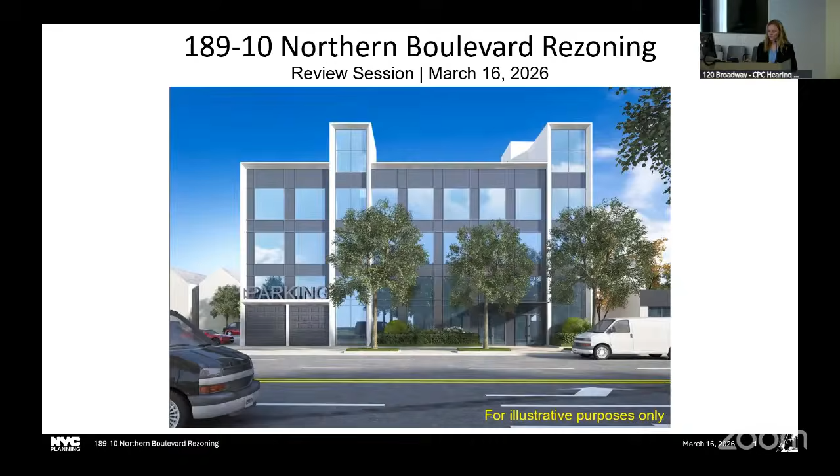Good afternoon, Commissioners. This is a private rezoning application for 189-10 Northern Boulevard. This application was filed by Prince Street 606 LLC, and it is located in Auburndale, Community District 11. It proposes a zoning map amendment to rezone from R3X and R3-2 districts to an R3-2 district with a C2-4 commercial overlay. This action will facilitate the development of a new 3-story commercial and community facility building with a total floor area of just under 15,000 square feet. It will also address split lot conditions on lots 11, 12, 22, and 27, and make as-of-right the existing legally conforming commercial uses along Northern Boulevard.

On May 10th in 2023, the CPC approved a similar application by the applicant for a zoning map amendment to change the project area to an R3-2 district with a C2-3 commercial overlay. The applicant later withdrew the application in July of that same year before the City Council vote due to a lack of political support. The applicant has reported to us that prior to starting this application, they spoke to the council member and the community board, and they expressed support.

On November 4th, 2025, voters approved New York Question 3, a ballot measure to revise the New York City Charter by adding Section 197E, the Expedited Land Use Review Procedure, or ELURP. This charter revision facilitates an expedited process for certain land use applications, including low-density rezonings like this one. Under this expedited review procedure, this project would undergo 90 days of public review instead of the typical 7-month timeline undertaken through the standard process. This enables a project like this to accelerate the timeline from proposal to approval.

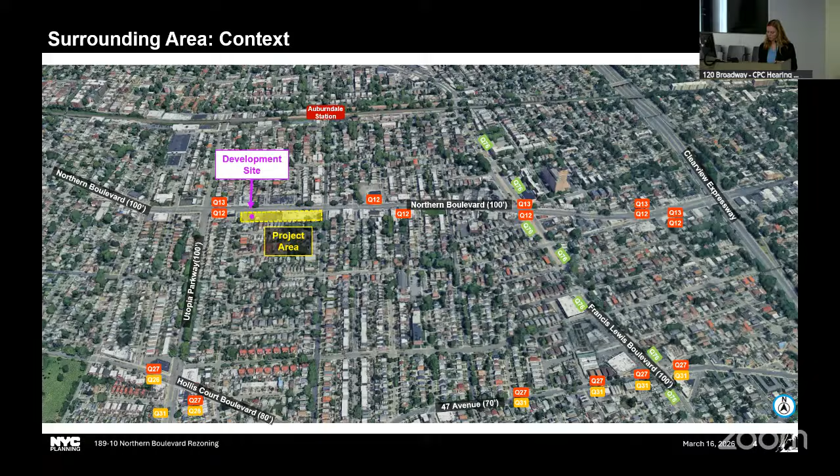The project area outlined in the dotted yellow line is split between R3-2 and R3X districts. The project area is surrounded by low-density residential districts, including R3X to the north and south of Northern Boulevard, and R2, R2A, and R4B districts to the west.

An R3-2 district with the C2-2 commercial overlay is located to the east of the project site, and the C2-2 overlay continues uninterrupted along Northern Boulevard for nearly 2 miles.

The surrounding area mainly consists of 1 to 3-story residential buildings for 1, 2, and multiple families, primarily within the R3X districts. Commercial buildings along Northern Boulevard are typically 1 to 2 stories and include restaurants, offices, and local retail establishments. There are also several auto-related uses.

The majority of the project area was mapped R3-2 in 1961 and has not been modified since. A small portion of the project area was rezoned to R3X in the 2010 Auburndale Oakland Gardens Hollis Hills rezoning.

The project area includes lots 10, 11, 12, 22, 27, and part of lot 5. The proposed development site, lot 11, is located at 18910 Northern Boulevard and has approximately 84 feet of frontage on Northern Boulevard and a total lot area of just under 10,000 square feet.

Currently, it is unimproved and used for parking and storage of materials. Lot 10, on the corner of Northern Boulevard and 189th Street, is improved with a restaurant and accessory parking. Behind it, Lot 5 fronts on 189th Street and contains a 2.5-story single-family residence and parking garage.

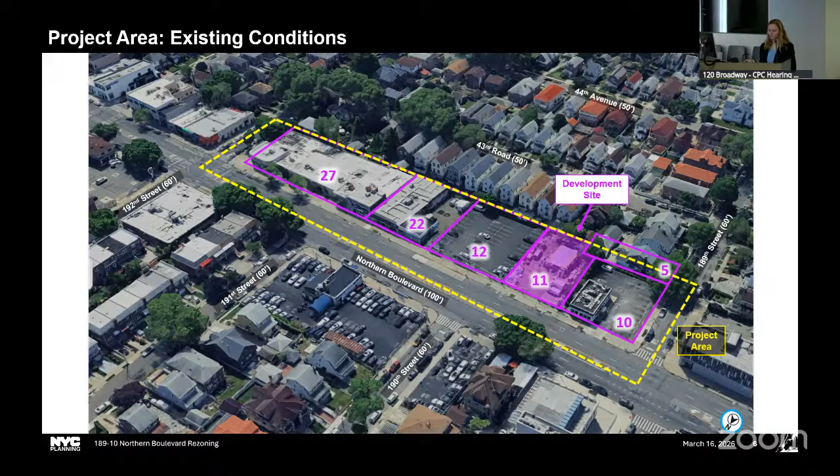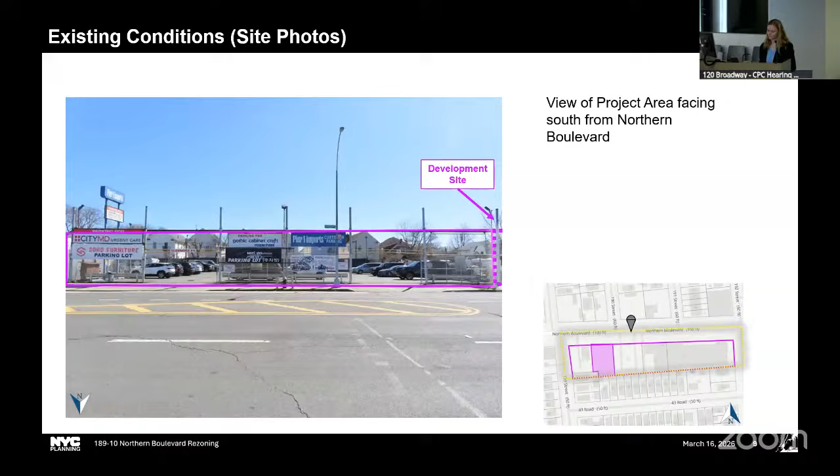Moving along, this shows the project area facing south from Northern Boulevard, and this image shows Lot 12. This is a view of the project area facing south again, and this image shows Lot 22.

And lastly, this is Lot 27, again facing south from Northern Boulevard.

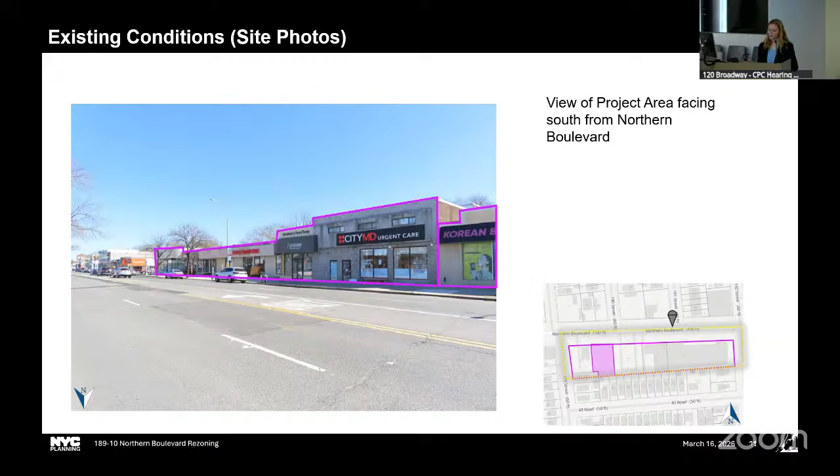The applicant proposes building a 3-story plus cellar commercial and community facility building totaling just under 15,000 square feet at 1.51 FAR. The applicant anticipates that the building will contain ground floor retail, second floor offices, and a third floor community facility. No parking spaces are required, though the applicant is proposing 26 spaces on the ground floor and in the cellar.

The proposed development also includes several streetscape improvements. 3 street trees are required, and in addition, the applicant proposes a front yard planting area within the 10-foot open area along the front lot line.

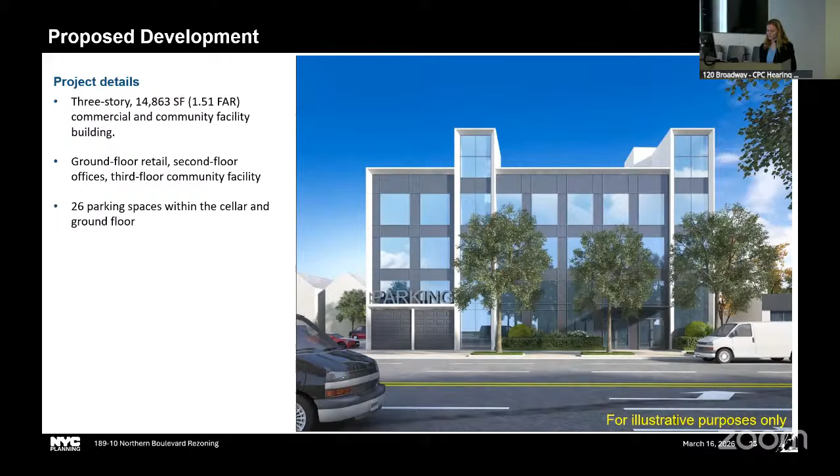To facilitate this development, the applicant is requesting a zoning map amendment from the existing R3X and R3-2 districts to an R3-2 district with the C2-4 commercial overlay. This would bring existing commercial uses along Northern Boulevard into conformance and fix split lot conditions on lots 11, 12, 22, and 27.

The existing R3-2 and R3X districts do not allow for commercial uses, and under the proposed actions, the allowed FAR increases from 1.0 to 1.6 for community facilities and increases to 2.0 FAR for qualifying residential sites within the greater transit zone, as per the City of Yes for Housing Opportunity Town Center zoning provisions.

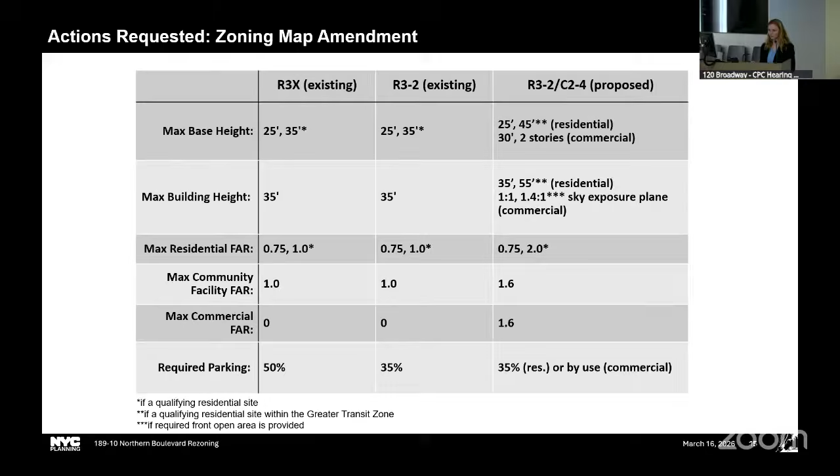In conclusion, this is a private application filed by Prince Street 606 LLC in Auburndale Community District 11. It proposes a zoning map amendment to rezone from R3X and R3-2 districts to an R3-2 district with a C2-4 commercial overlay. This will facilitate a new 3-story commercial and community facility building with just under 15,000 square feet of floor area, and will address split lot conditions on lots 11, 12, 22, and 27, making as-of-right the existing legally non-conforming commercial uses along Northern Boulevard. Thank you, happy to take any questions.

Is this the first ELURP listing post-adoption? I'll hand it over to Alec to talk about ELURP. No, this is not the first ELURP. You saw the Sawmill Creek application on Staten Island, which was the resiliency acquisition. This is the first brought by a private applicant.

Thank you. Questions? Yeah, I just had a quick question on the residential zoning, just the R3-2 versus R3X and what the implications are for the non-applicant controlled site. I think I may have missed that in the table there. Go back. Are you talking about uses outside of residential? No, just the residential. Okay, I think I just misunderstood.

The R3-2 C2-4 proposed has the 2.0 FAR for residential. Got it, okay, I think I just misread the 1.0. Got it, and that's because of the City of Yes, the town center provisions. Yes, is that right? Okay, got it. So this would allow the vacant, or not the accessory parking lot just to the east of the site, to be a more densely developed residential building if that eventually becomes a development site. In theory. Yeah, okay, got it, thank you.

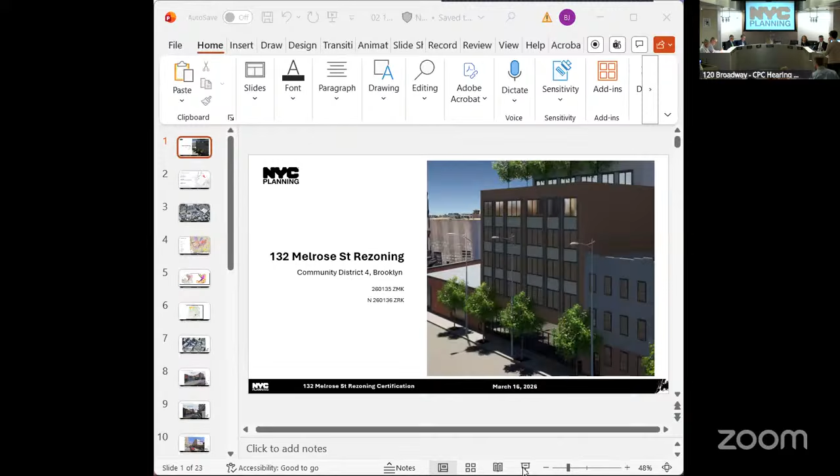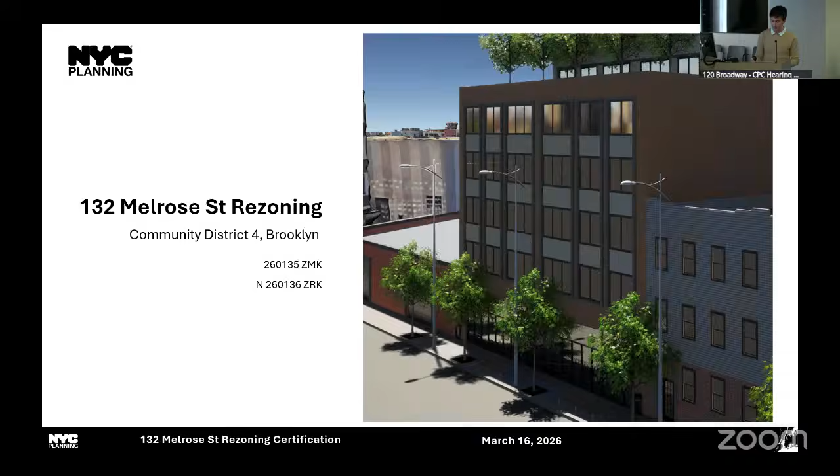This is a private application by Melrose Towers Corp, proposing a zoning map amendment from an M1-1 to an M1-2A, R6A, MX-22 zoning district, and a zoning text amendment to Appendix F to establish a mandatory inclusionary housing, or MIH, area with options 1 and 2. These actions would facilitate a new 6-story, 26,500 square foot mixed-use building with 18 dwelling units, 5 of which would be permanently income restricted pursuant to MIH, and 6,500 square feet of ground floor commercial. This project is located at 132 through 136 Melrose Street in the Bushwick neighborhood of Brooklyn Community District 4.

This is an aerial view looking northwest at the project area, highlighted in purple. The project area is located on Melrose Street, a 50-foot wide street between Evergreen Avenue and Stanwix Street. It is about a half-mile north from the Central Avenue M subway station and a half-mile northwest from the Myrtle Avenue JMZ subway station. Numerous bus lines provide local service along Bushwick Avenue and Flushing Avenue.

The project area is located across the street from the mixed-use Denizen Bushwick complex, facilitated by the 2013 Rheingold rezoning, which consists of 2 buildings containing 911 dwelling units. This complex was completed in 2019 and includes a fresh grocery store and other active commercial ground floor uses. Nearby community facilities include the NYC Department of Social Services, which has a SNAP and Job Center on Evergreen Avenue, and PS 145, located less than a quarter mile away. Green Central Knoll Park is a 3-minute walk away and contains a playground and softball fields. Bushwick Avenue, south of the project area, functions as a primarily north-to-south corridor connecting Broadway Junction to East Williamsburg.

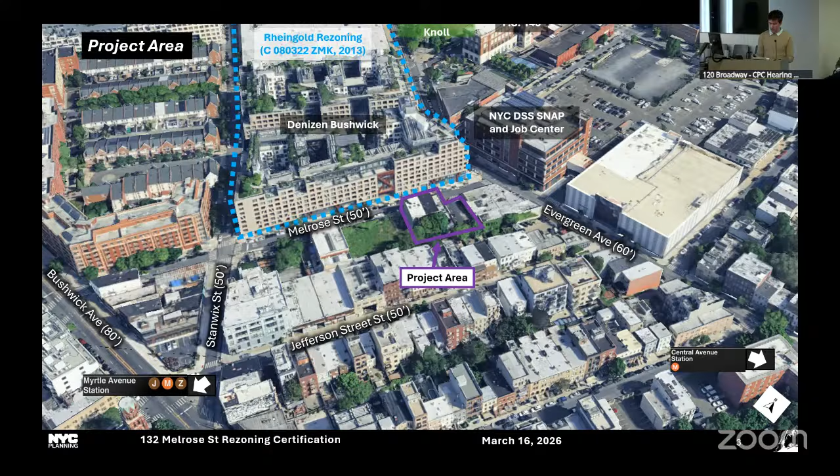Land uses in the surrounding area contain a varied mix of industrial, commercial, community facility, and residential uses. Much of the surrounding industrial lots are 1- to 2-story warehouse and distribution centers with parking lots. Melrose Street has numerous unimproved lots, and the development site is adjacent to a 1-story restaurant supply store. The residential blocks surrounding the project area from the south, east, and west consist of 3- and 4-story multifamily residential walk-up buildings. The project area is currently zoned M1-1. Across the street there is R6A, R7A, and R7A C2-4 zoning, rezoned as part of the 2013 Rheingold rezoning. The surrounding residential blocks are zoned R6, with R7-2 northwest of the project area. There's both M3-1 and M1-2 zoning across Evergreen Avenue to the north.

The project area is within the boundaries of the Bushwick Neighborhood Plan, a draft plan DCP published in 2019 after 5 years of outreach and planning efforts. The land use framework was built upon the existing conditions of the neighborhood, and in the plan the project area was designated as a proposed mixed-use area, to encourage the continuity of a mix of uses. Additionally, the proposed zoning district for the project area in the plan was R6A M3.

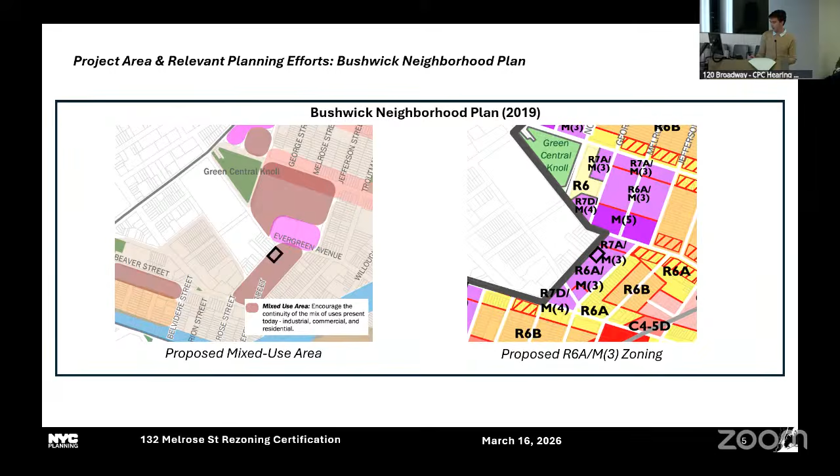The project area was also studied in the New York City Industrial Plan, which DCP published in 2025. The project area is designated as a neighborhood industrial area, which is defined as having the greatest mix of uses that are closest to residential uses and transit.

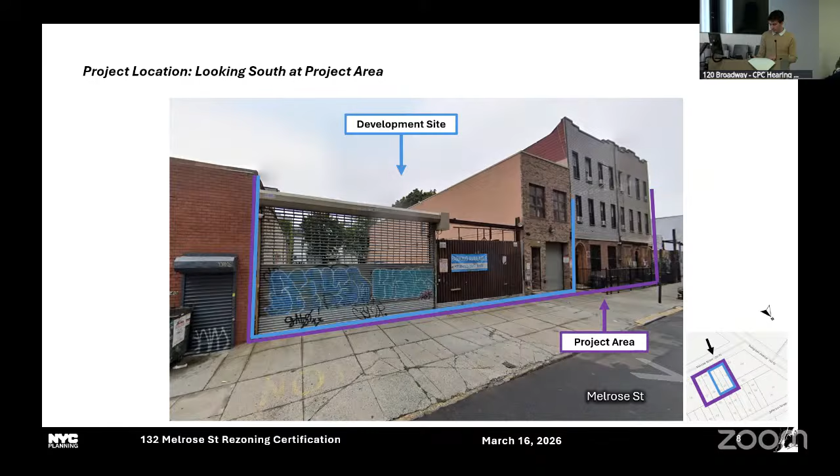This is a view looking west on Melrose Street. You can see the project area on the left. The 9-story Denizen Bushwick campus is across the street from the project area.

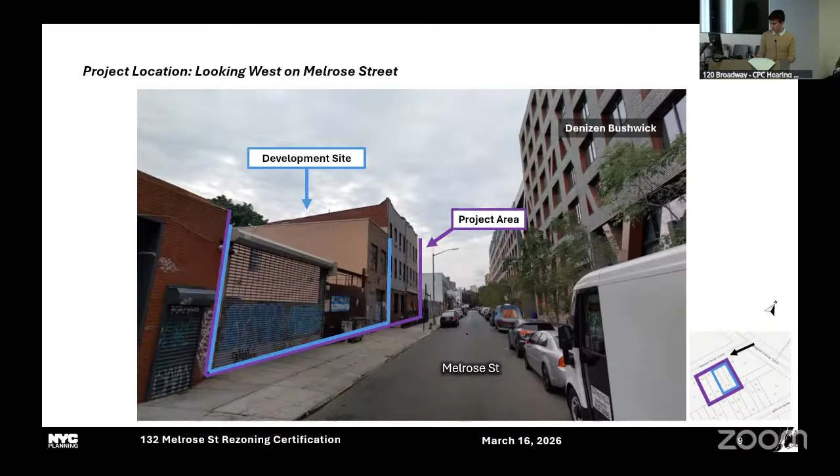The proposed development is a new 6-story, 26,500 square foot mixed-use development. The building will rise to a height of 65 feet, with 6,500 square feet of ground floor retail, and then 5 stories of residential uses above. The proposed development includes 18 dwelling units, 5 of which should be MIH option 1. No parking is required or provided with the development.

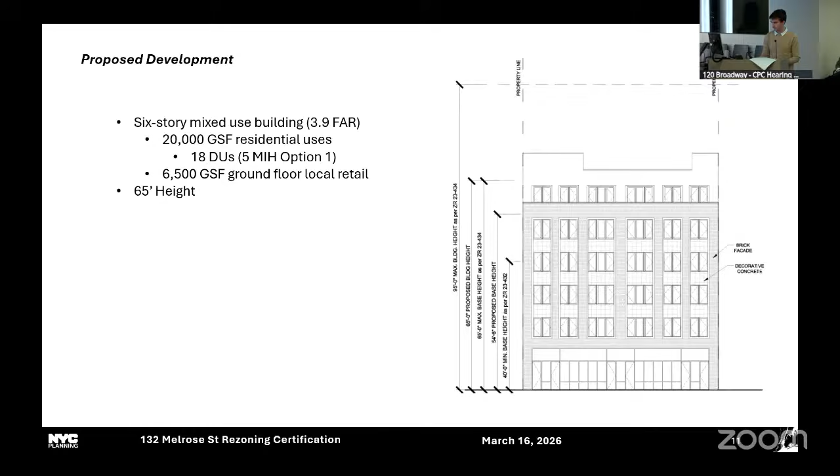To facilitate the proposed development, the applicant seeks a zoning map amendment from an M11 to an M12A, R6A, MX22, and a zoning text amendment to Appendix F to establish an MIH area with options 1 and 2.

The zoning map amendment seeks to change an existing M11 to an M12A, R6A, MX22 district. The proposed district will be mapped with a 70-foot offset from Evergreen Avenue and to a depth of 100 feet. It will be mapped 115 feet wide.

The proposed M12A R6A district has a maximum building height of 95 feet. The maximum residential FAR with MIH is 3.9. The maximum manufacturing, community facility, and commercial FAR are each 3. Parking is required for 25% of dwelling units but can be waived if less than 15 spots are required.

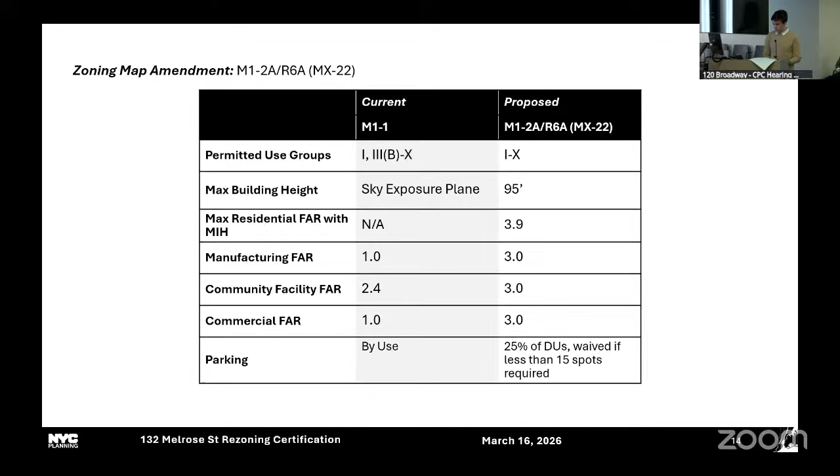The proposed zoning text amendment to Appendix F would map an MIH area with options 1 and 2 for an area coterminous with the project area. Option 1 requires 25% of the residential floor area to be income restricted for households on average making 60% area median income or lower. Option 2 requires 30% of the residential floor area to be income restricted for households on average making 80% AMI or lower.

No RER was required for this project, as the proposal does not increase permitted residential floor area by at least 50,000 square feet per Local Law 78.

In summary, this is a private application by Melrose Towers Corp, proposing a zoning map amendment from an M1-1 to an M1-2A R6A district and a zoning text amendment to Appendix F to establish an MIH area with options 1 and 2. These actions would facilitate a new 6-story, 26,500 square foot mixed-use building with 18 dwelling units, 5 of which would be permanently income restricted pursuant to MIH, and 6,500 square feet of ground floor commercial. The project is located at 132 through 136 Melrose Street in the Bushwick neighborhood of Brooklyn Community District 4.

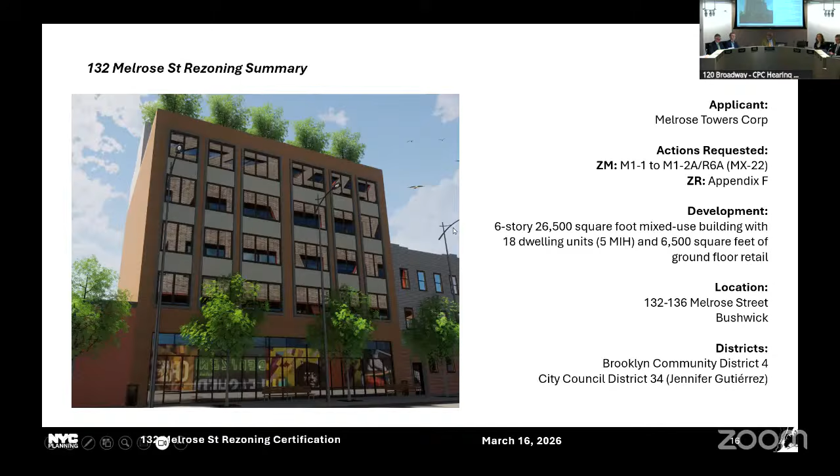Going once. Commissioner Osorio on Zoom. Commissioner Osorio: Thank you so much, Vice Chair Knuckles. Thanks so much for the presentation. Two quick questions from my end.

Thanks so much for acknowledging the connection with the industrial plan. Given what you said, I was wondering if you can help us understand why an R6 as opposed to an MX designation here. Is there an opportunity to have industrial uses on the first floors, or was that ever part of the conversation? I know the applicant is seeking an R6, but since this is an M to R change, I want to understand the extent of the conversation in terms of maximizing the potential for mixed industrial residential use here.

Oh, I want to clarify the proposed zoning district is an MX district. So can you explain the extent to which the applicant is considering some type of industrial use on the first floor? It sounds like it's just retail, right?

Yeah, the applicant indicated in their application retail, but they can speak more during the public hearing about the intent of the ground floor. But so far, I just want to confirm that this has been part of the conversation, since this is a ULURP and we are certifying this proposal.

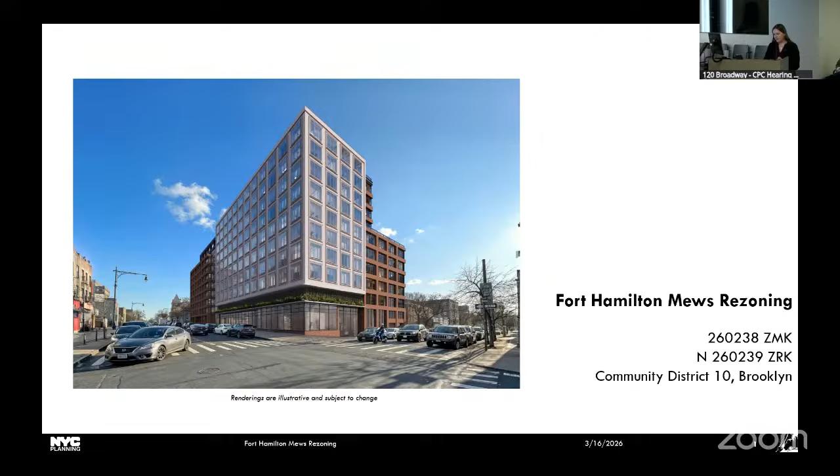This is a private application from 9305 Fifth Avenue LLC for a zoning map amendment from R6B C2-3 and R5B to R7X C2-4 zoning district, all within the Special Bay Ridge District, and a zoning text amendment to Appendix F to facilitate development of a new 11-story mixed-use development, including approximately 220,200 square feet of residential space, or 292 dwelling units, 88 of which will be permanently income restricted, approximately 12,100 square feet of commercial space, 1,100 square feet of community facility space, and 75 sub-cellar level parking spaces.

The project is located at 9305 Fifth Avenue, at the corner of Fifth Avenue and 94th Street in Bay Ridge, Community District 10. It's located in City Council District 47 with Councilmember Kayla Santosuosso.

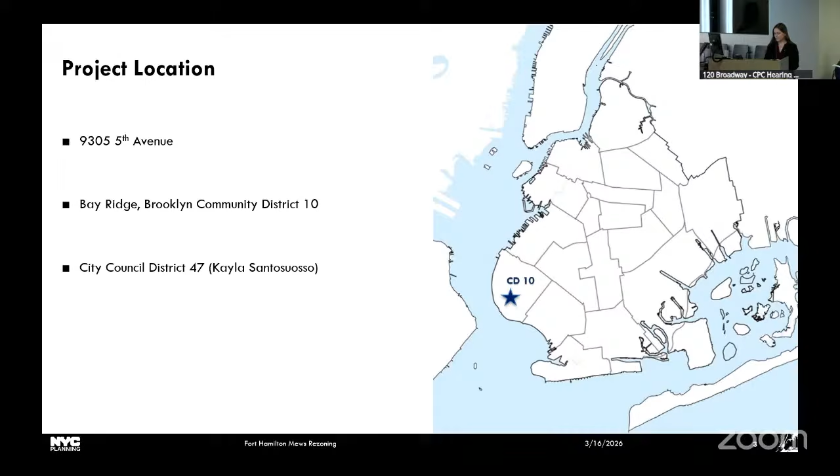There are several public transportation options for bus and subway service near the project area. The R subway line runs along 4th Avenue, and the nearest stop and terminus of the R line, the Bay Ridge 95th Street Station, has an entrance near Fort Hamilton Triangle.

The R provides local connections to Manhattan and Queens, as well as connections to express trains at DeKalb Avenue, as well as the LIRR Atlantic Terminal.

There are several bus routes which operate in the area, including Select Bus Service S79, which provides service to Staten Island, and the B8, B63, S53, and S93.

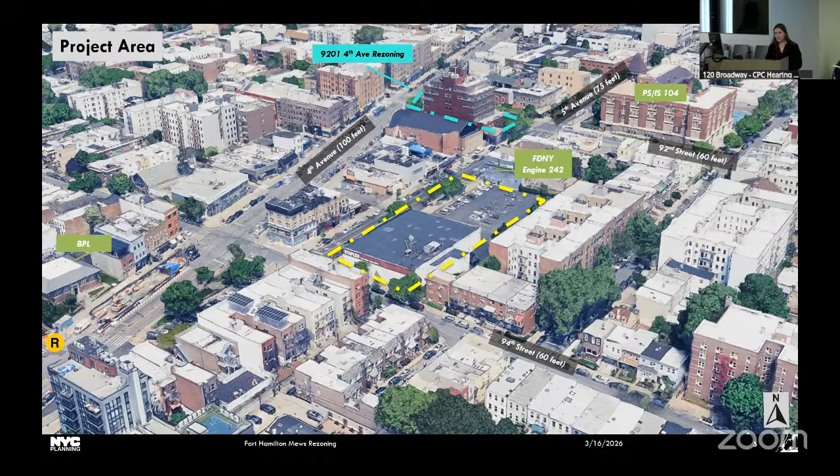Also in this area are commercial office buildings and community facilities, as well as an area subject to rezoning in 2021 at 9114 Fifth Avenue and the first mapping of MIH in Community District 10.

South of the project area is a mix of 1 to 3 family residential buildings, 3 to 4 story mixed-use commercial and residential buildings, and community facilities. To the east of the project area are 1 to 2 family and 4 to 6 story residential buildings.

C2-3 and C2-4 commercial overlay districts are also present. R4 and R5 are low to mid-density residential districts, while R6 and R7 contextual districts are mid-density residential districts.

In 1978, the Special Bay Ridge District was created to preserve the neighborhood's low-rise character, to ensure contextual development, and to protect neighborhood-scale commercial areas along main corridors. The project area was rezoned from R6 to R6B and R5B in the 2005 Bay Ridge rezoning.

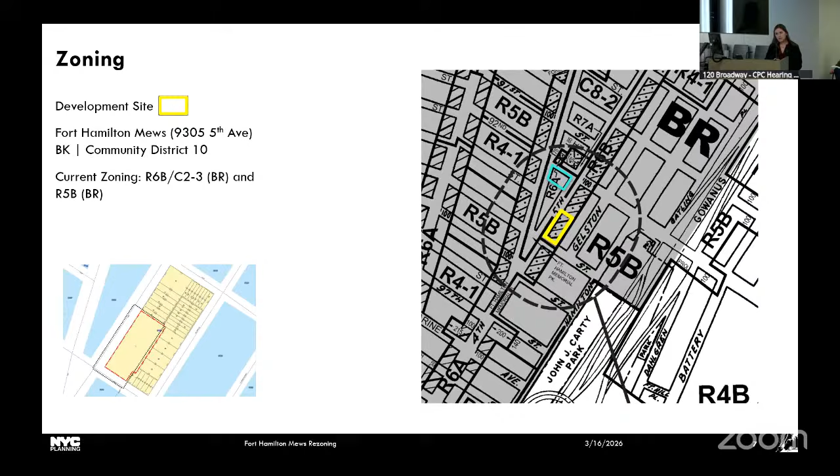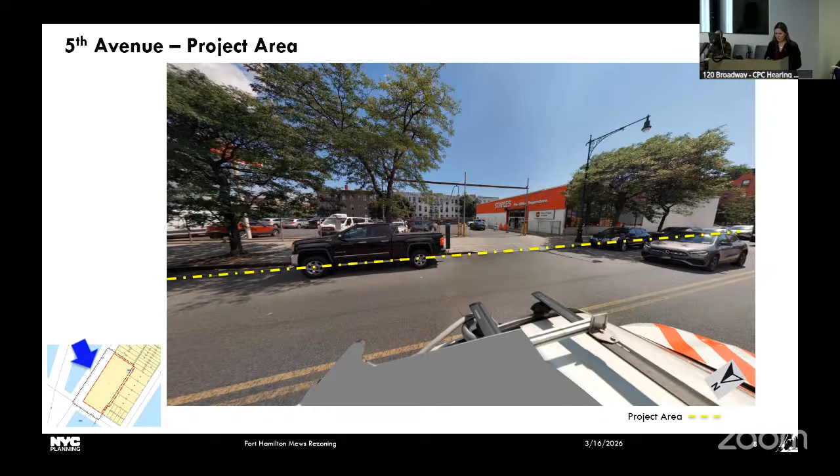This view is from further north on Fifth Avenue, so you can see the extent of the parking area on the site. In the background, you can see the Verrazano Bridge, and on the right and left of the photo, you can see the mixed-use residential and commercial buildings near the project area.

Here we're looking at the project area from Fifth Avenue, looking north, at the intersection just south of the intersection with 94th Street. To the left is Fort Hamilton Triangle, and to the right are mixed-use commercial and residential buildings, which are representative of Fifth Avenue in this area of Bay Ridge.

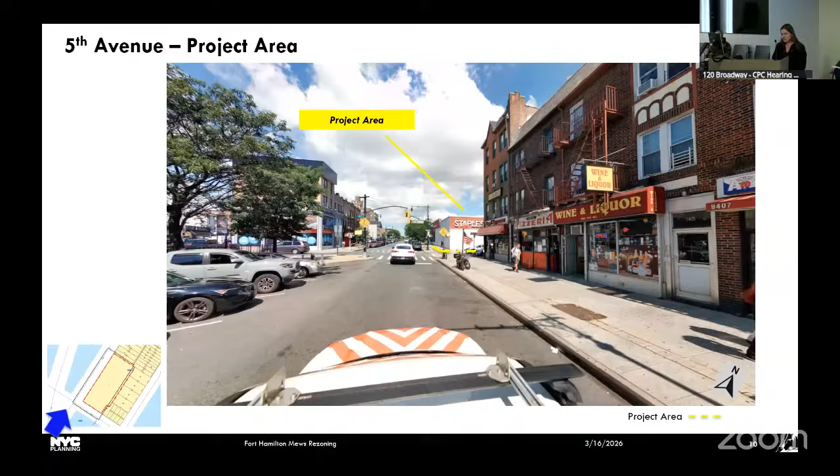The proposed actions would facilitate the development of an 11-story mixed-use commercial and residential building totaling 233,400 square feet. The proposed development will include 292 dwelling units, of which 88 would be permanently income restricted.

The development will also include approximately 12,100 square feet of commercial space and 1,100 square feet of community facility space. The proposed development will have a base height of 102 feet and will rise to a max height of 111 feet.

Parking would be provided in a subcellar accessible via curb cut along 94th Street, and the applicant is currently proposing 75 parking spaces, more than are required by zoning.

To facilitate this project, the applicant seeks 2 actions: a zoning map amendment and a zoning text amendment to Appendix F.

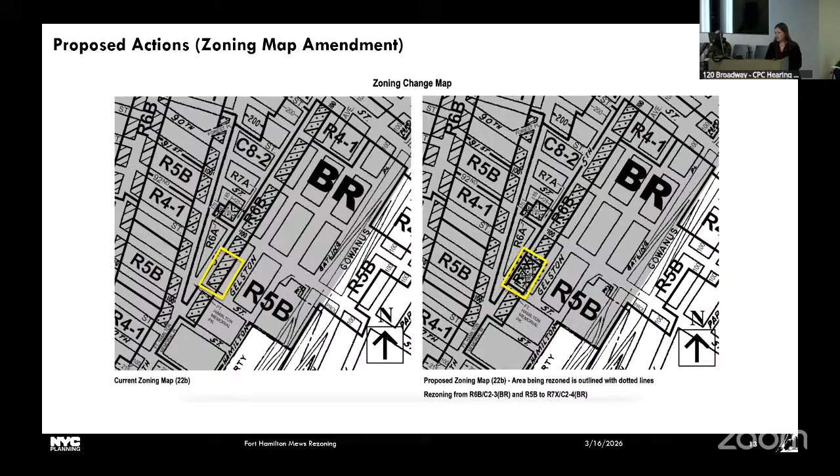The zoning map amendment seeks to change the existing R6B C23 and R5B districts, part of the Special Bay Ridge District, to an R7X C24 district. This is a residential district with a commercial overlay that allows a maximum residential FAR of 6 with MIH, an FAR of 5 for community facility uses, and an FAR of 2 for commercial uses. After a base height of 105 feet, buildings can top out at 145 feet.

The applicant also proposes a zoning text amendment to Appendix F to map MIH coterminous with the project area, creating permanently income restricted housing via MIH Option 2. Option 2 requires 30% of residential floor area to be permanently income restricted at 80% AMI.

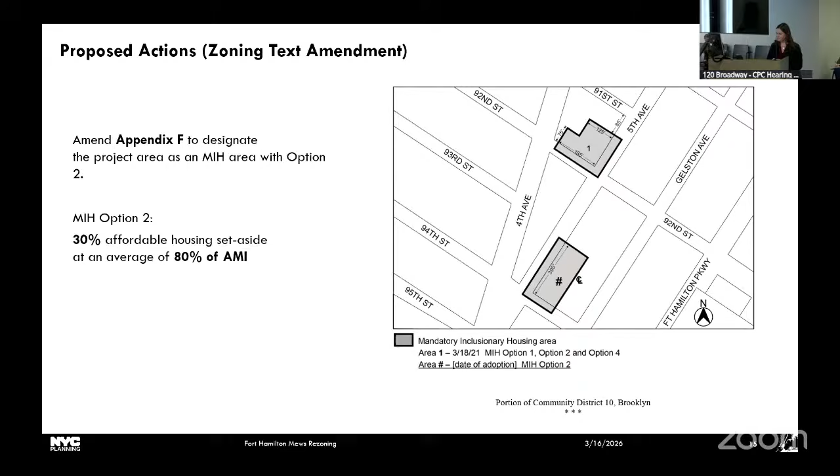This application requires a racial equity report on housing and opportunity. The area median household income for the project area is $88,927, which is higher than the median income for Brooklyn and New York City. The applicant proposes to provide MIH units that meet 40%, 60%, and 80% AMI income band limits.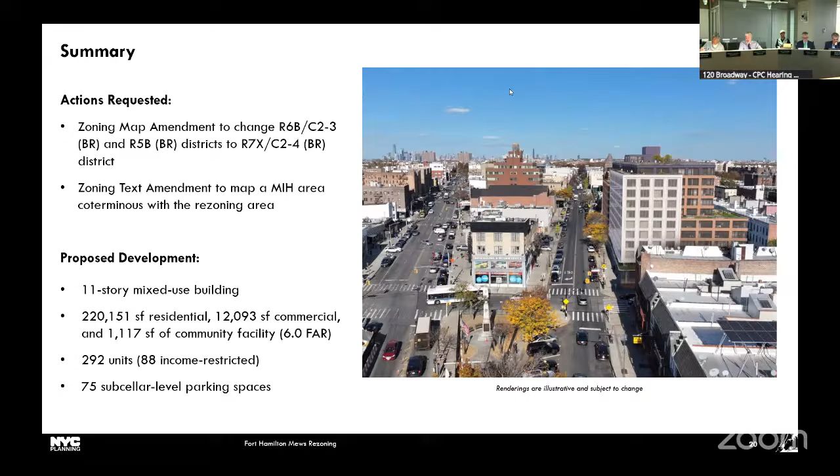Commissioner Benjamin: I just wanted to make the point again that I've made before, that when you look at the expected rents for the rent-restricted apartments versus the market rate, you'll note that the rent-restricted in many cases is higher than the market rate. So I question why we're doing that, because who would take a moderate income apartment if a 3-bedroom for $3,600, when if they just went to a market apartment, they would rent it for $3,200. What are we trying to achieve?

Yeah, I think that's a super fair question. Whenever we're looking at the existing rents out on the market, we're talking about likely older buildings, and also a relatively limited number of apartments out there. Whenever we're looking at these newly built ones, the reason the rents are looking higher than the asking rents out there in the wild is because they have to have the financing. So whenever we're looking at the MIH units, the 80% AMI affordable units, they are still lower than what a privately financed development would produce without MIH being present, if we're talking new versus new. But the 100% AMI units, which would be 29 units, would be estimated to be higher.

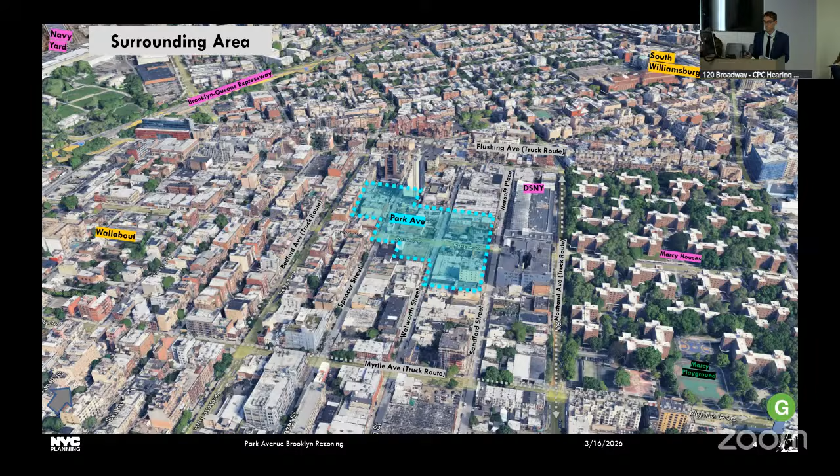Existing zoning in the project area is M1-1 and M1-2, manufacturing districts mapped in 1961. The MX area to the west, in an M1-2 R6A district, was rezoned in 2001 as part of the Flushing Bedford rezoning, which permitted residential uses, partially in response to a number of BSA variances that were being requested in the area during that time. Adjacent residential districts are characterized by 5 to 7-story residential buildings and some smaller walk-ups, including R7A and R7D along corridors like Myrtle.

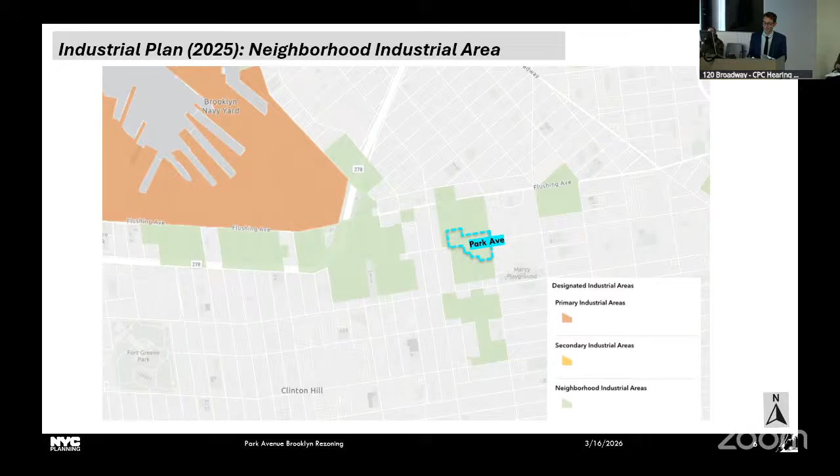The project area was designated as a neighborhood industrial area in the 2025 NYC Industrial Plan, which has the greatest mix of uses and is closest to residential uses and transit. The project area is also partially in the coastal zone. We can see here the northern half of the project area, separated by Park Avenue in the middle, is in the coastal zone.

So next I'm going to walk you through some site photos of the project area. Bear with me, it's a fairly large project area for rezoning across the 5 blocks. And I'll note that all the proposed development sites are applicant owned.

So this is a view of the south side of Park Avenue. We can see the Hatzola ambulance service site and also some local retail to the left. Both ends of this block frontage are proposed for residential with ground floor retail.

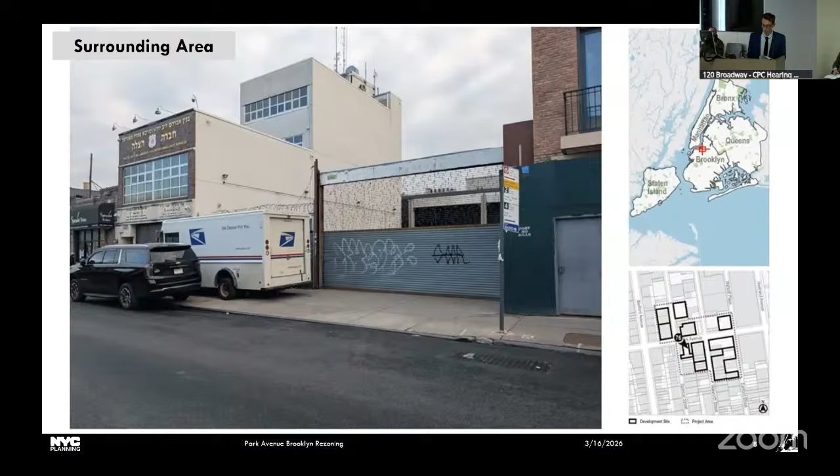Here we're looking on Park Avenue, looking south down Walworth Street towards Myrtle Avenue. In addition to the residential with ground floor retail along the Park Avenue frontage, the mid-block brick buildings, which we can see mid-block in the distance here on the 50-foot narrow Walworth Street, are planned to be new yeshivas.

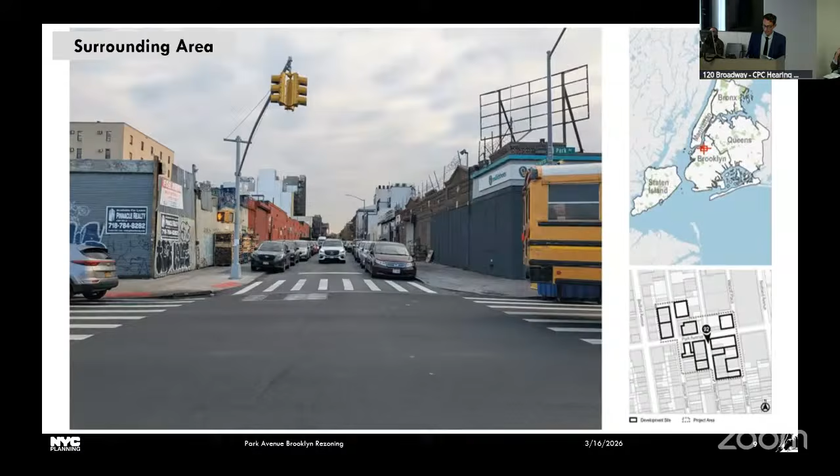Moving east on Park, we're looking towards Sanford Street. The applicant's pallet and tire businesses are proposed for new residential with ground floor retail.

Here we're looking south along the east side of Walworth Street from Park Avenue towards Myrtle. We can see cars parked partially on the sidewalk, which is a common condition due to the very narrow streets and sidewalks in the project area. Material storage from local businesses on sidewalks is also common across the project area, as we can see in this photo, further restricting sidewalk widths. As I mentioned, the applicant proposes mid-block yeshivas on both sides of this street, which I'll further detail later on.

This view is the other side of Walworth at the same intersection on Park Avenue, looking southwest. An applicant-owned 1-story retail building containing a bakery, shipping business, children's clothing store, and sewing supply store are all within this retail building and proposed for residential with ground floor retail.

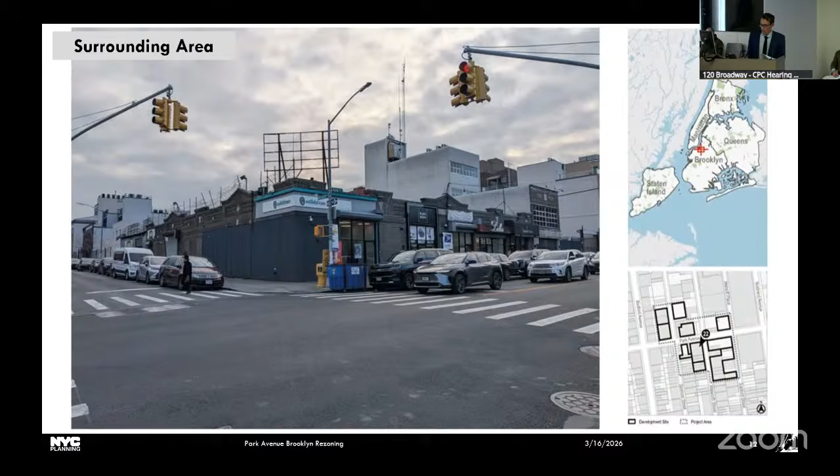Here's a view of Park Avenue with the existing Central Talmudic Academy on Sanford, from Park Avenue looking down Sanford. On the right here with the green awning is the Central Talmudic Academy. Note the narrow sidewalk and street causing the school bus to park partially onto the sidewalk.

Here's another view of one of the residential development sites on Park Avenue and Walworth, looking west down from Park Avenue.

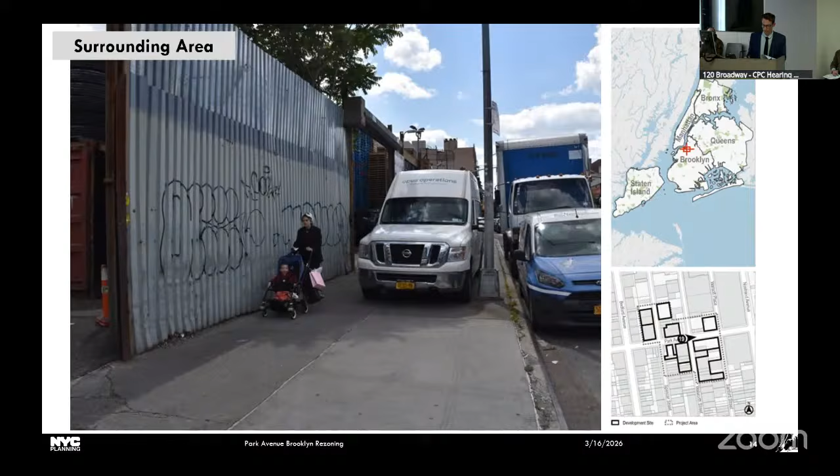Here is the south side of Park and Walworth looking towards Myrtle. Residential is proposed in the foreground on Park, with Yeshivas mid-block on both sides of the street.

Now moving down Walworth, looking north this time towards Park. These are the two brick buildings I mentioned: currently an HVAC supply building on the left, and a non-conforming yeshiva on the right, both proposed for new yeshivas.

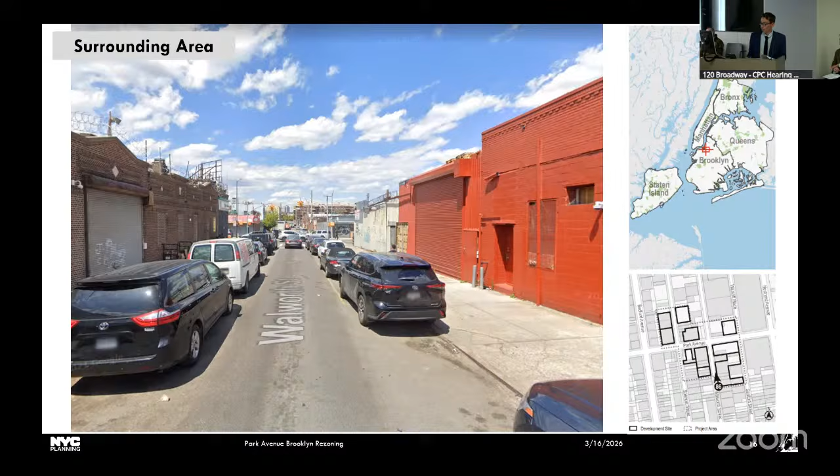Now looking at the north side of Park Avenue between Walworth and Spencer, the one-story retail building seen here on the left includes a party and plumbing supply company and is proposed for residential with ground floor retail.

Yes, before you leave that. Sure, I'll go back. The residential high-rise that's adjacent to... in the distance, yeah. What is the zoning there? So that's actually in the M1-1 or M1-2, and it's not residential. It's actually using the 4.8 community facility FAR there. So it's office? Office with other community facility uses, newly constructed. All right, I thought it was residential. Okay, thank you. Of course.

Wait a minute, can I? Yeah. Is it office or is it community facility with dorms? So the website lists it as office space. They used the 4.8 community facility FAR to construct it. So it could be dorms. It could be, yeah. Okay, please continue. Of course.

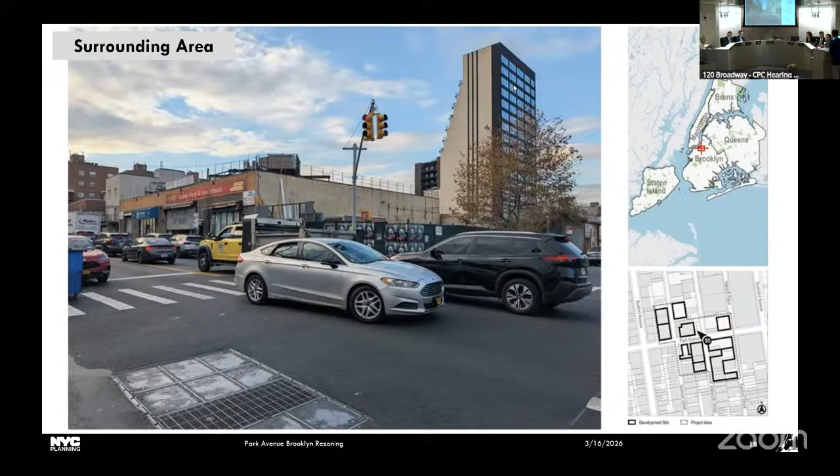Let me just catch up. So now we're looking... let me get my notes.

Okay, so now looking north on Park Avenue between Walworth and Spencer, up Spencer, the two-story building on the left here is a bedding store and healthcare center, and it's the only residential development site planned for an expansion over an existing building.

Just to be clear, out of all the residential sites, this is the only one that will not be completely new top to bottom. It will be an expansion on top of this existing community facility building on the corner on the left here. Just beyond it is the non-conforming, non-complying three-story warehouse, which currently houses Yeshiva Betzrim Satmar.

Continuing north, looking on Spencer back towards that same intersection on Park, we see a vacant lot on the left proposed for the Beth Chana Yeshiva. The adjacent curb cut in the foreground, again on the left, is part of that recently constructed community facility office building we just spoke to.

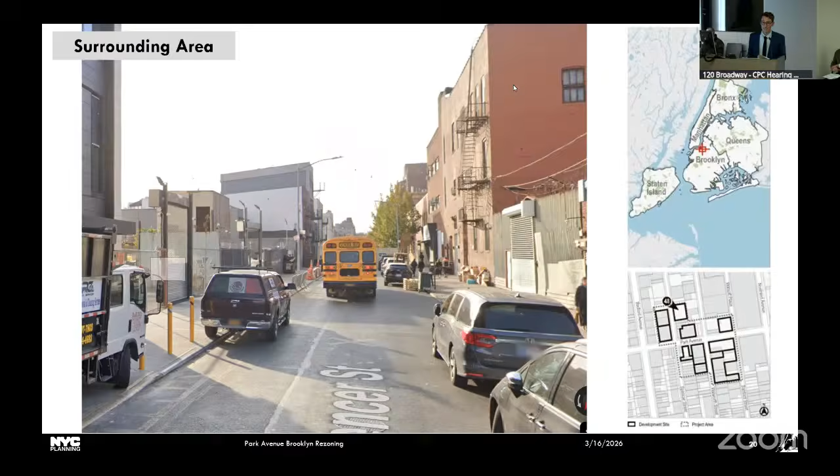On March 13th, a Notice of Completion of Draft Environmental Impact Statement, or DEIS, was issued. The DEIS identified significant adverse impacts with respect to open space, transportation for both pedestrian and traffic, and construction noise.

Specifically for transportation, incremental demand from the proposed actions would significantly adversely impact 6 sidewalks. At this time, one sidewalk impact would be fully mitigated in the weekday afternoon peak hour. DOT has identified potential mitigation measures for the remaining 5 sidewalk impacts, including widening the sidewalks and eliminating parking lanes. However, at this time, the applicant is not electing to pursue these mitigations.

Mitigation measures can continue to be explored between certification of the DEIS and publication of the FEIS. However, if no mitigation measures are implemented, these impacts would remain unmitigated and result in unavoidable, significant adverse impacts.

And now getting on to the proposed developments. Across these 5 blocks, the applicant proposes 10 development sites. This application was centered around the creation, legalization, and expansion of private schools, yeshivas. Additionally, the rezoning will facilitate 6 mixed-use residential buildings.

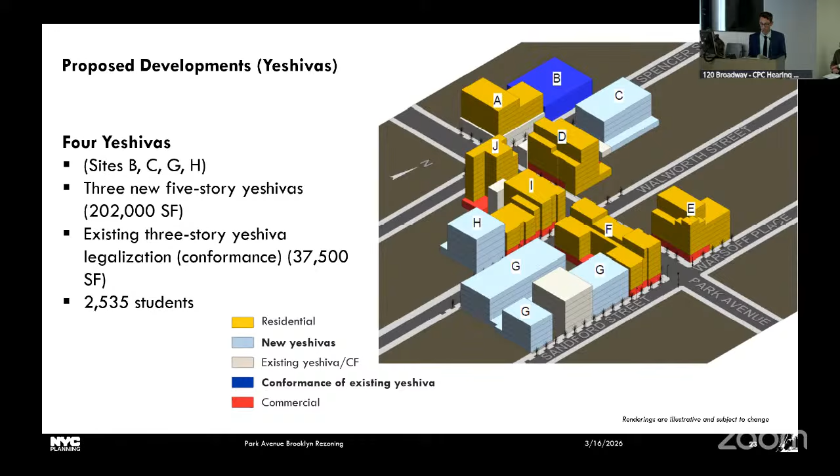I'll now briefly detail each yeshiva site. First, Site B at 48 Spencer is the non-conforming Yeshiva Litzarim Satmar, that currently operates without BSA approval and would be brought into conformance through the proposed actions. The 3-story yeshiva would have 315 school seats at 37,500 square feet.

Site C, the Beth Chana School at 49 Spencer Street, would be a 497-seat girls' high school and would be 45,000 square feet, or 3.6 FAR.

Site G is an expansion of the Central Talmudic Academy. Is there a question? Oh, of course.

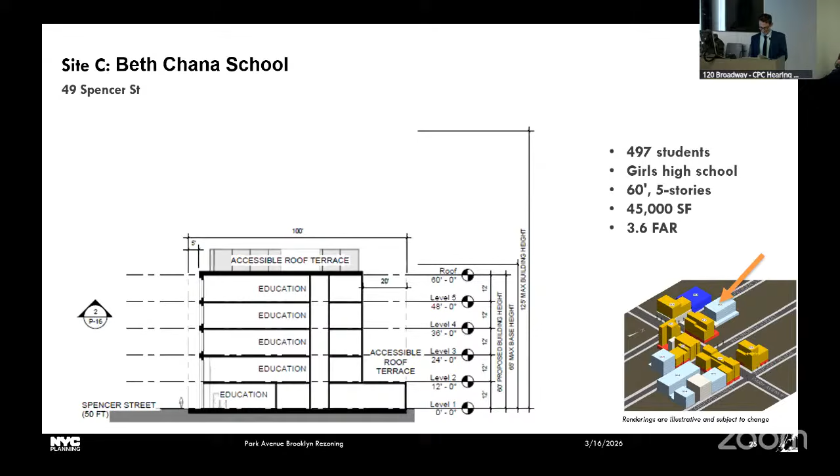An expansion of the CTA, a K-12 yeshiva that currently operates with the BSA special permit at 84 Sanford Street. The new development would expand both north and south on Sanford and west through the block onto Walworth Street. In total, this campus would accommodate over 1,400 students with over 130,000 square feet of floor area, or just over 3.6 FAR.

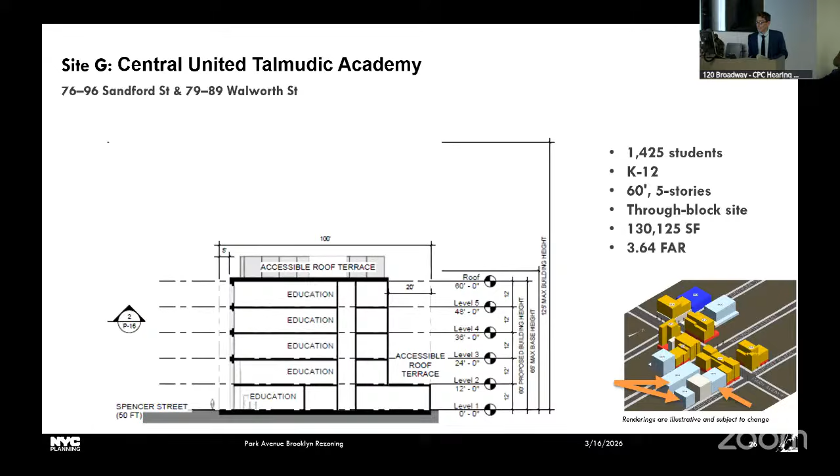Lastly, Site H, Yeshiva B'nai Ahavas Israel, at 88 Walworth, directly across from the Central Talmudic Academy we just looked at, would accommodate just under 300 students at 27,000 square feet. Here's an illustrative rendering of the two yeshivas on Walworth, looking towards Park Avenue, with Site H, Yeshiva B'nai Ahavas Israel, on the left, and the western wing of the Central Talmudic Academy on the right, which would go all the way through to Sanford Street.

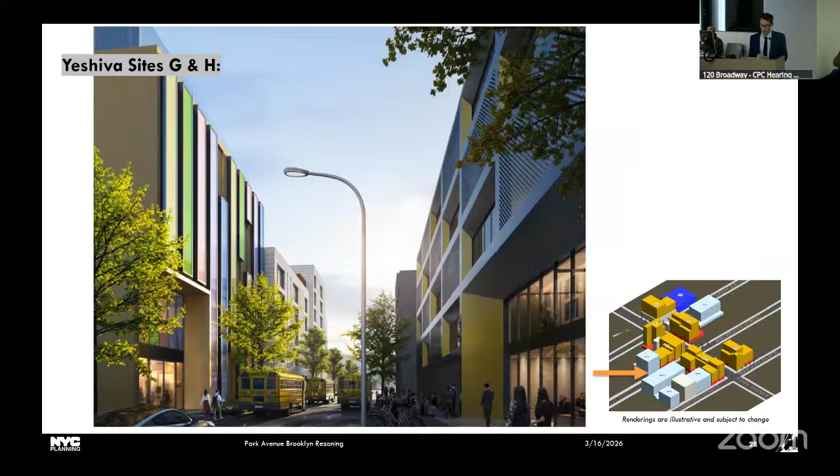Moving on to the residential proposed developments, these 6 sites would line Park Avenue, ranging from 7 to 11 stories, with a total of 391 units. 101 would be permanently income restricted per MIH.

This view looks west down Park Avenue from Warsoff Place, with Sites F and E on the left and right, respectively. We can see the 6 residential sites here in yellow. In total, these proposed developments would be 394,000 square feet of floor area, ranging between 4.8 and 5.6 FAR. Approximately 67,000 square feet of ground floor retail would be provided.

Site A on the corner of Park and Spencer would be the extension above the existing 2-story community facility building that I spoke to earlier, and the only residential site with community facility floor area.

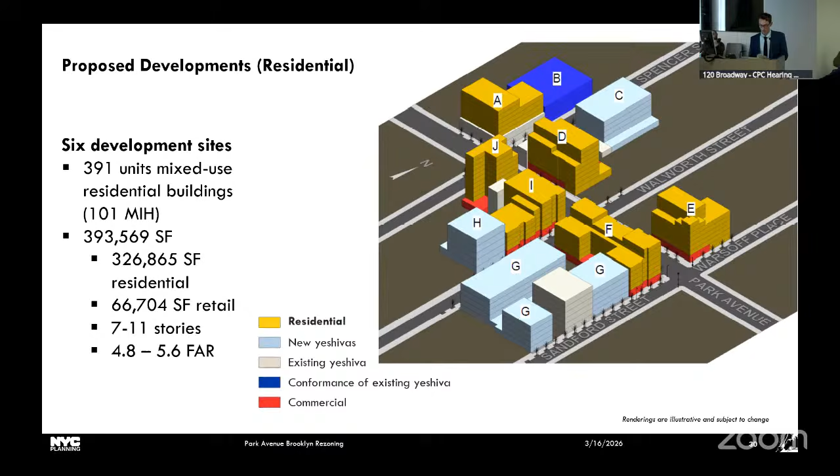To facilitate the proposed developments, the applicant proposes a zoning map amendment to rezone the project area and a zoning text amendment to map MIH. The zoning map amendment would rezone the project area from M1-1 and M1-2 to M1-4/R6-1 and M1-4/R7D, extending the existing MX4 district directly to the west.

The M1-4/R7D would be mapped at a depth of 100 feet along Park Avenue to facilitate the proposed residential uses while activating the non-residential ground floor uses. The M1-4/R6-1 district would be mapped along the narrow north-south streets, Spencer, Walworth, and Sanford, to facilitate the yeshiva development in conformance, as educational uses are not currently permitted in the existing M1-1 and M1-2 zones, while still allowing M uses with the option for residential development.

M1-4/R6-1 permits a community facility FAR of 4.8 and a residential FAR of 3.9 with MIH. Buildings can top out at a height of 125 feet. M1-4/R7D permits 5.6 FAR for residential uses and 4.66 for community facility, both at a height of 125 feet. Both districts permit commercial and manufacturing FARs at 2.0, and parking is not required within the inner transit zone.

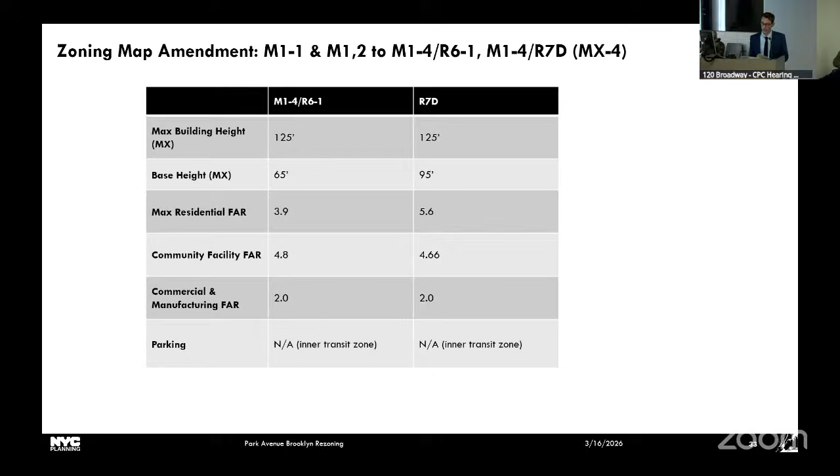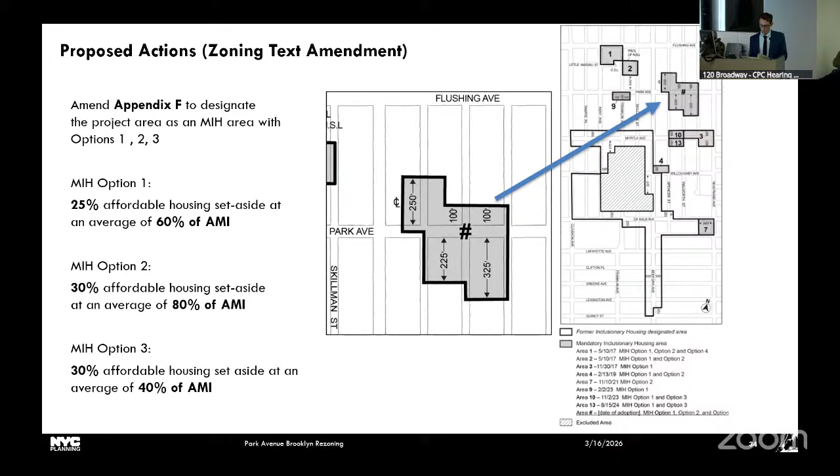The applicant proposes a zoning text amendment to amend Appendix F of the zoning resolution to designate the project area as an MIH area with options 1, 2, and 3. Option 1 requires 25% of floor area set aside at an average of 60% of AMI. Option 2 requires 30% set aside at an average of 80% AMI. And option 3 requires 30% set aside at an average of 40% AMI, ensuring permanently income-restricted housing in any residential development.

The applicant's racial equity report found that area median household income for the project area is $76,000, which is lower than the median income for both Brooklyn and New York City. The applicant proposes to provide MIH units that meet 40%, 80%, and 100% AMI income band limits.

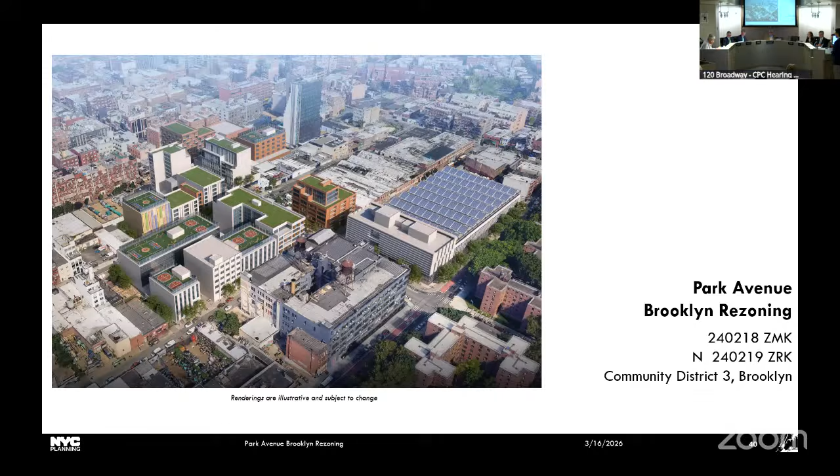I have a number of questions about this proposal. I do know the area, and the first part is a zoning question. Since the applicant does not propose any manufacturing on these sites, why are we rezoning it to a mixed use

instead of residential? Thank you for the question, Commissioner. I can let the applicant speak more to their rationale. But by having an MX district, since there are active M uses within the project area, it would allow them to stay in conformance and allow for existing M uses.

Other than some storage type facilities, are there active manufacturing uses in this rezoned area? There are warehouse and transportation uses. I just had the other ones up.

There's not a lot of activity going on, mainly in manufacturing, those sites. Transportation and warehousing, right. There's not a lot of activity going on in those sites. I think we can all agree on that. There are about 19 businesses total, not all of which are manufacturing.

So I'm concerned about that part of it, that this is clearly intended to be residential, and it's residential in a location that could still support manufacturing.

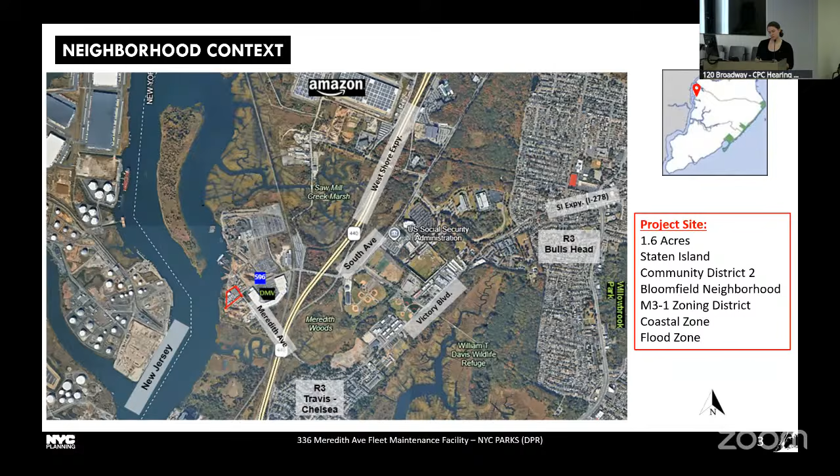And here you can see what the actual shape of the lot is. And in the spirit of Shaolin and keeping the Wu alive, one could say that the shape of this lot actually looks like half of the Wu-Tang logo. And if you know, you know.

You can also see here more clearly where Meredith Avenue and South Avenue dead end near the site. This lot is somewhat sandwiched between other lots, and it does not go up to the shoreline.

I mentioned previously that the site is ready to go, meaning that Parks will take this site as is, and they don't need to make any improvements to the site other than a fresh coat of paint. So it's ready to go for their fleet maintenance facility, and this is in part because the property previously served as such a use.

It used to be an MTA bus depot and repair facility, which was in operation for about 15 years, and the MTA vacated this space at this site in January of 2025.

So this site is already suited for Parks operations because it has enclosed space for vehicle repair operations, as well as sufficient outdoor space for fleet parking and equipment storage. The photos that you see here are actually from when it was operating as an MTA bus depot repair facility.

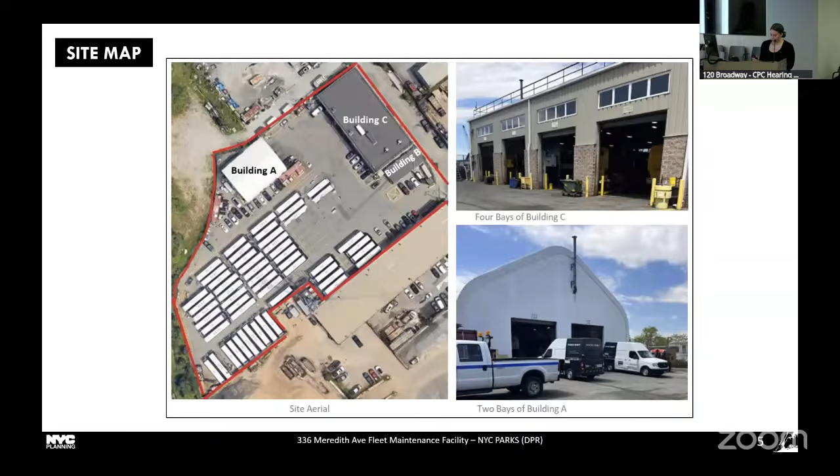This is the land use in the project area, which is mostly industrial, highlighted in purple. The site's immediate neighbors include construction and construction-related businesses like Big Apple Ready Mix, the concrete supplier, and WWC Corp., which is a demolition contractor.

There's also a 2-story home, which you can see highlighted here in yellow, and that presumably predates the zoning, but signage on the site indicates that WWC Corp. is using that house as their offices.

And also to the right, highlighted in red, is commercial and office use, that is the West Shore Plaza commercial complex, which includes a DMV that I mentioned earlier. You can kind of see it in this map, but there's also overlapping green space, such as wetlands and open space shore, that's kind of embedded within these commercial and industrial uses.

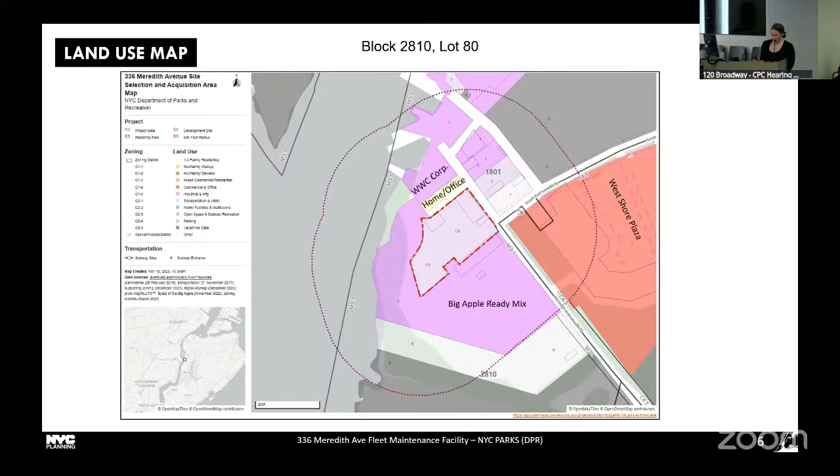So what's the need for Parks to have this facility? Well, New York City Parks and Staten Island Fleet are sharing a space that's operated by the City Department of Sanitation. That's within Freshkills Park.

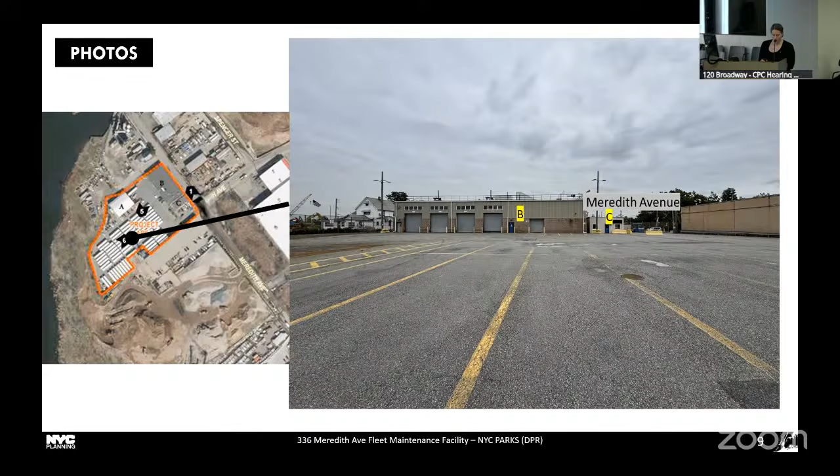So having this site would address those operational needs by providing a centralized, appropriately equipped facility capable of serving approximately 200 NYC Parks vehicles, including heavy-duty and specialized equipment essential to borough-wide park maintenance and forestry operations, for example beach maintenance and emergency response.

So this proposed project is necessary to maintain Parks' existing service levels and meet their current and projected fleet maintenance needs for Staten Island. Also, given the lack of alternative suitable sites on Staten Island, this proposed project represents the only feasible means of addressing this operational need.

So in summary, the applicants, New York City Parks and DCAS, are seeking a combination acquisition and site selection of real property by the city to facilitate the acquisition of a 70,000 square foot property and the site selection of the New York City Park Fleet Maintenance Facility.

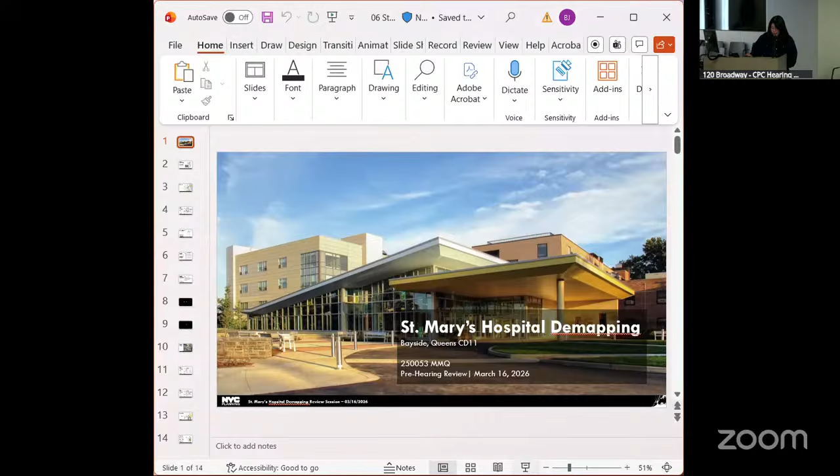Today I'll be presenting St. Mary's Hospital demapping for pre-hearing review. This is an application by St. Mary's Healthcare System for Children, proposing a change to the city map to eliminate 2 privately owned unbuilt streets and to discontinue and close a portion of the street. The proposed action would support construction of a new 357 square foot entrance vestibule to the hospital's main lobby, along with 2 drop-off canopies and enhanced internal driveway circulation. The applicant is seeking this action to remove existing encumbrances on the hospital property and facilitate these site improvements.

This application was certified by the Department of City Planning on December 1st, 2025.

Here is the land use area map. The project area is located within the R2A zoning district, surrounded by R1-2 zoning district, comprised of low-rise and low-density detached homes on small lots.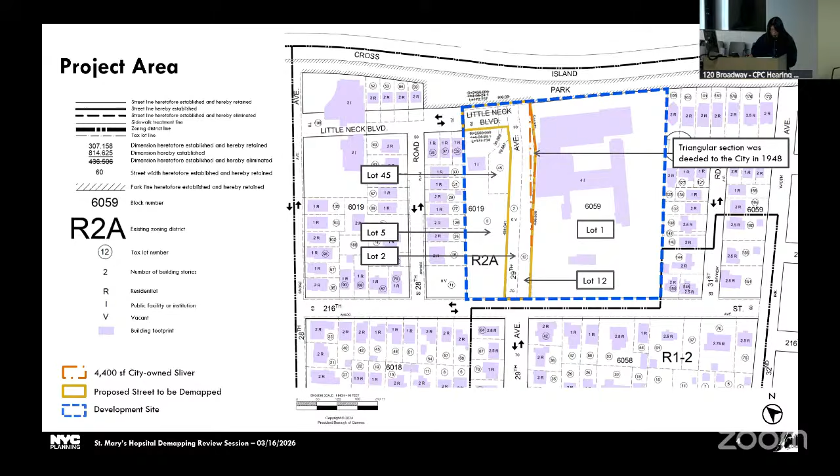The area proposed in the map is highlighted in yellow and includes mapped but unbuilt segments of both streets. The segments are 70 feet wide and privately owned by the applicant, except for the city-owned portion, shown in the orange dash-dot-dashed line. The streets are not built and are not used for public access or transportation.

To summarize, St. Mary's Healthcare System for Children is requesting a city map amendment to eliminate mapped but unbuilt privately owned portions of 29th Avenue and Little Neck Boulevard, and to discontinue and close a portion of 29th Avenue. These streets are not used for public access and currently restrict the hospital's ability to optimize its campus layout. These improvements are intended to support more efficient and accessible operations without increasing hospital capacity.

On February 2nd, 2026, Queens Community Board 11 passed a conditional favorable recommendation of this project with 31 in favor, 2 against, and 0 abstaining. The application was recommended for approval on the condition that buses serving hospital patients no longer park on adjacent residential streets or along the park. In addition, all buses must comply with the 3-minute engine idling regulation and avoid idling beyond the permitted time.

On February 19, 2026, the Queens Borough President held a public hearing, and on March 3rd, 2026, issued a conditional favorable recommendation of this project. It was recommended for approval with conditions related to hiring and contracting for future hospital operations and projects, and expressing support for Community Board 11's conditions. That concludes my presentation. Thank you, and I'm happy to take any questions.

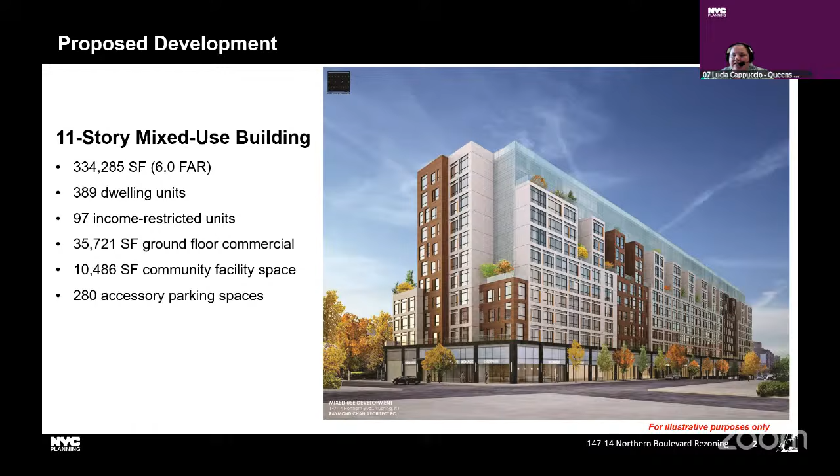Next slide, please. The applicant is seeking a zoning map amendment from an existing R5 C1-2 zoning district to an R7X C2-3 and R5 zoning district, and a zoning text amendment to map mandatory inclusionary housing, option 1, coterminous with the project area.

Next slide, please. On February 9th, 2026, Queens Community Board 7 voted 30 in favor, 3 opposed, and no abstentions to pass a resolution recommending approval of this application. Next slide, please.

On February 19th, the Queensborough President held a hearing on this application and submitted a recommendation of approval with conditions. Conditions pertain to MWBE and local hiring goals, and decreasing the number of studio apartments and increasing the unit mix of 2-bedroom and 3-bedroom apartments to better accommodate families. The applicant rep will be here on Wednesday to address any and all questions raised by the commission. If you have any questions for me now, I'm happy to answer them as well. Thank you.

Hello, Vice Chair Knuckles and Commissioners. This is a pre-hearing presentation for Monitor Point, certified by the Commission on December 15th, 2025. This is a private application by Go Quay LLC, the Metropolitan Transit Authority, and the Greenpoint Monitor Museum and related actions. The project is located in the Greenpoint neighborhood of Brooklyn, Community District 1. The proposed development consists of 3 new buildings totaling approximately 940,000 square feet and would contain 1,150 units, including 300 income restricted under MIH Option 1, commercial space, community facility space, including a permanent home for the Monitor Museum, and waterfront public access areas.

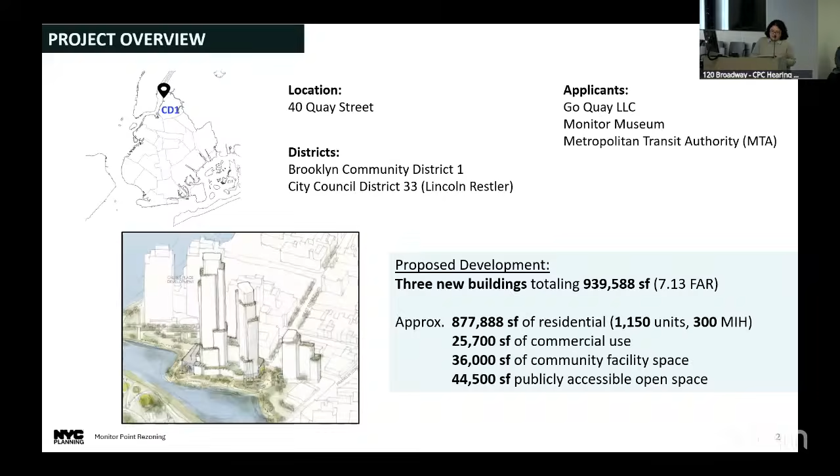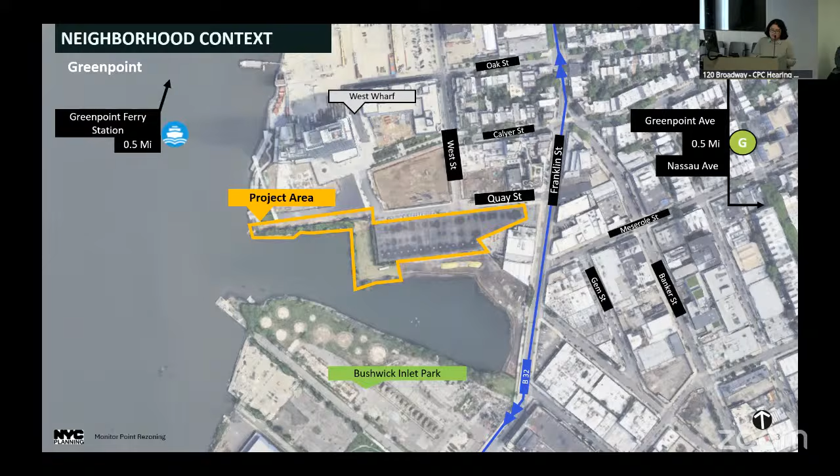The project area in yellow is located just north of Bushwick Inlet Park, alongside the East River waterfront, and consists of 2 lots on Block 2590, Lot 1 and Lot 25, and the northern half of former Quay Street. Nearby transportation includes the Greenpoint Ferry Station, Greenpoint Avenue and Nassau Avenue G stations, and the B32 bus.

To facilitate the proposal, the applicant is seeking a zoning map amendment to rezone the project area, zoning text amendments, a large-scale general development special permit to waive loading requirements, and a city map change within a separate application, application 250326 MMK. In addition, the applicant is seeking a chair certification pursuant to 62-811 to demonstrate compliance with waterfront regulations.

The applicant proposes to rezone the project area from M3-1, R6, and R6/C2-4 zoning districts to R6, R6/C2-4, R8, and R8/C2-4 zoning districts.

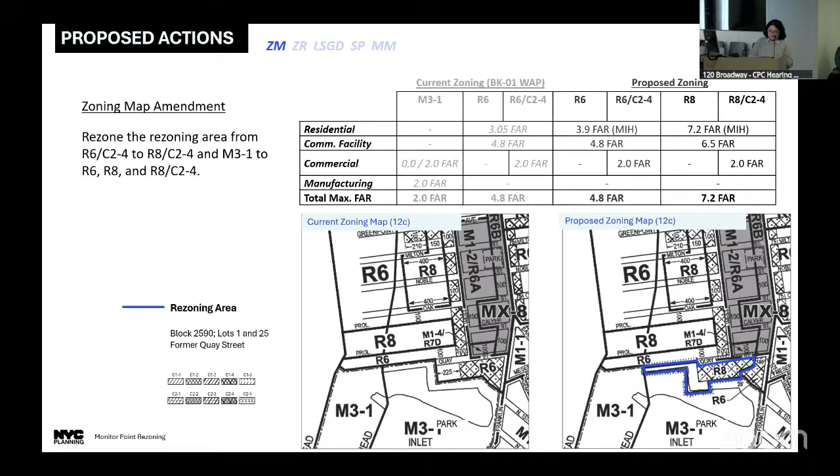The applicant seeks to amend Appendix F to designate the project area as a mandatory inclusionary housing area pursuant to Options 1 and 2. Option 1 requires that income-restricted housing be set aside at 25% of the residential floor area at an average of 60% area median income, AMI. Option 2 requires 30% of the residential floor area be provided at an average of 80% AMI.

The applicant is proposing 1,150 units, 300 of which would be permanently income restricted under MIH Option 1.

In addition, text amendments to amend the special bulk regulations applicable to waterfront blocks within the BK1 waterfront access plan area. As the first MIH project being mapped on waterfront blocks within the WAP area, the applicant proposes to amend Section 62-361 to establish and reference MIH bulk regulations within the special bulk regulations that apply to the waterfront.

Second, to accommodate an MIH FAR and tower-based envelope for R8 districts that's higher than the current R8 special bulk regulations, the text would permit a maximum height of between 500 and 600 feet for R8 districts within the BK1 WAP area. Third, to align with the proposed demapping of Quay Street that is currently mapped as parkland, the text would remove park designation from parcel 19 of the BK1 WAP maps. Lastly, the text would allow large-scale general developments within the BK1 WAP area to waive or reduce the number of required loading berths if certain findings are met.

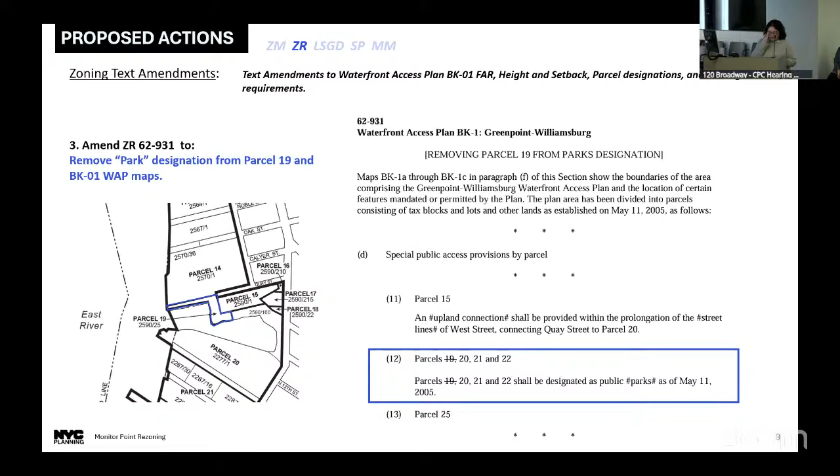The applicant is seeking a special permit pursuant to the Large-Scale General Development, LSGD, for a series of waivers to modify rear yard regulations, modify height and setback regulations, modify tower size and tower width of walls and waterfront yard depths. The proposed envelope would be established as part of the special permit approvals for the three buildings.

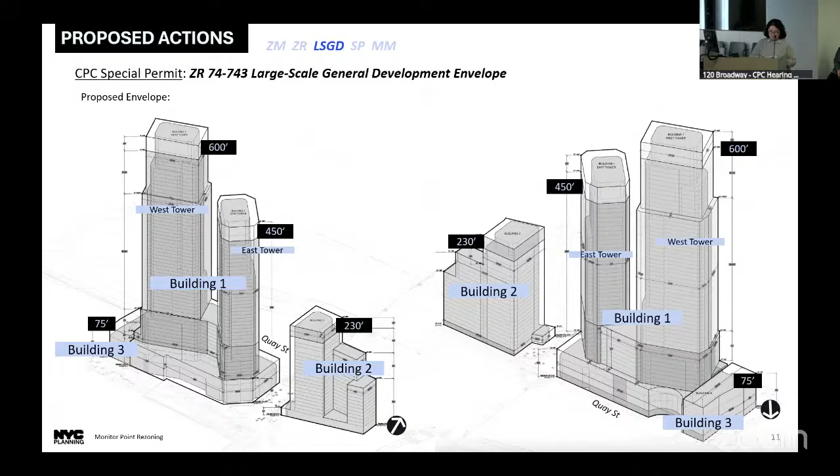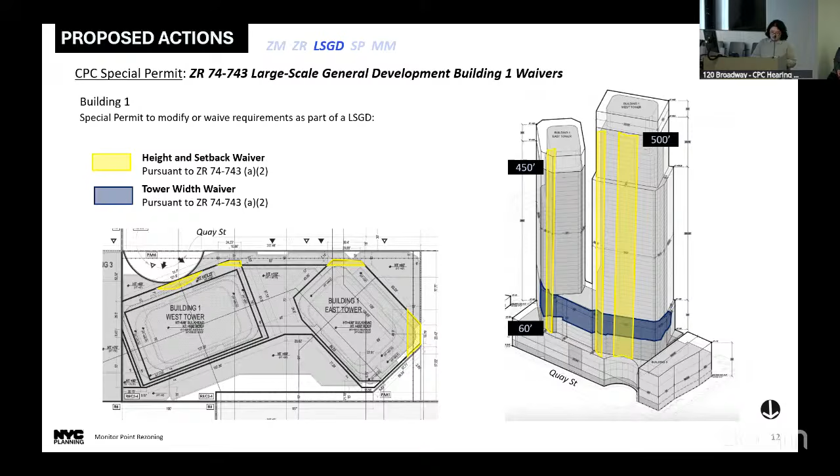Waivers to height and setback and tower width waivers are requested for building 1. Waivers to height and setback and street wall height and location waivers are requested for building 2. Waterfront yard waiver is requested for building 3. Additionally, bulk special permit approvals include building design and controls that address aspects including bulkhead screening of mechanicals, building setbacks, street wall articulation, and transparency requirements.

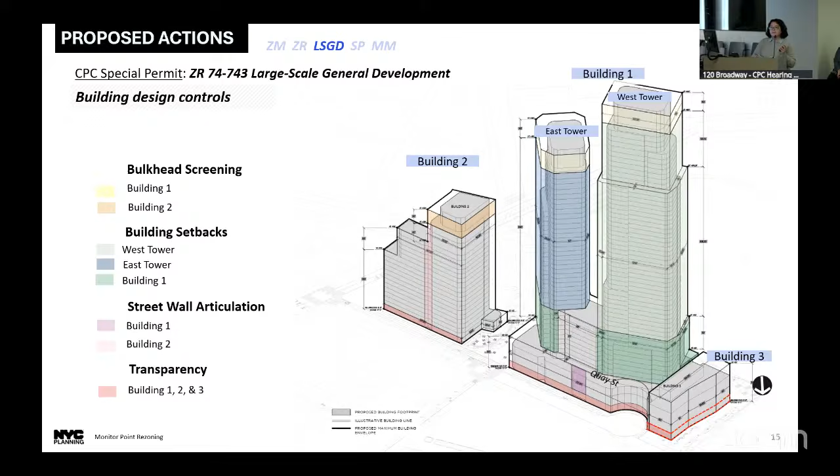The applicant proposes a city map change within application 250326 MMK to remove the park designation on mapped block 2590, lot 25, and the northern half of former Quay Street. The area to be demapped was originally mapped as park in 2005 as part of the Greenpoint-Williamsburg rezoning.

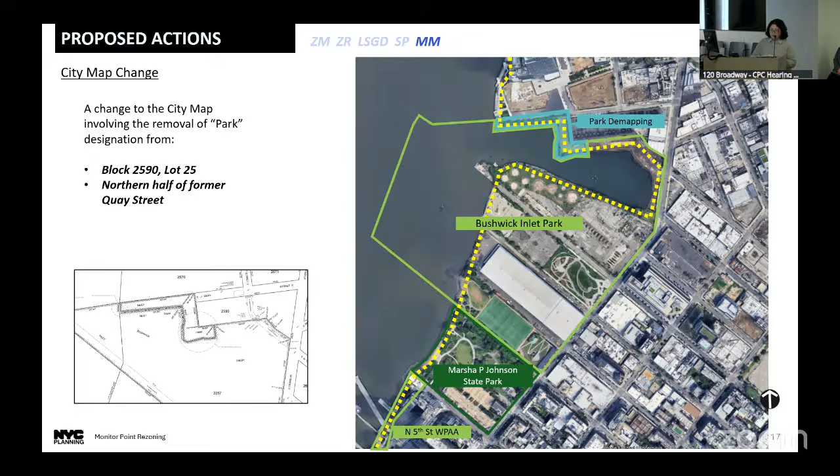A notice of completion of the draft environmental impact statement was issued on December 12, 2025, and identified significant adverse impacts with respect to transportation, traffic, and pedestrians, as well as construction as it relates to traffic and pedestrian noise. Mitigation measures have been identified in the DEIS and will be explored further in the final environmental impact statement, FEIS.

On January 20th, 2026, Community Board 1 held a public hearing, and on February 12th, 2026, voted conditional favorable with 26 in favor, 9 against, and 0 abstaining. Your packet, and the materials posted online, include a more detailed memo of the board's recommendation.

Related to the actions of the project: maintaining a 40-foot wide waterfront public access area adjacent to the proposed museum building, with additional conditions regarding Bushwick Inlet Park funding, income-restricted unit breakdown preference and locational requirements, transportation conditions relating to the G train, adjacent bike lane, and construction on site, public access, a new MTA facility and museum deliverance, and a request for public restrooms within the development.

On March 11th, the Brooklyn Borough President held a public hearing, and the department has yet to receive comment. In addition, to clarify with the Commission, at certification the department was asked about the infrastructure areas on site.

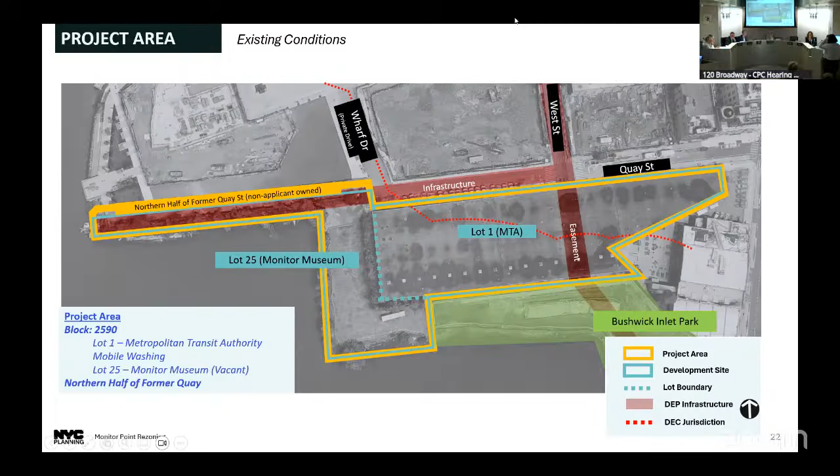Thank you. I just had a question, then I'll open it up. On the demapping of the park parcel, that has to be replaced, does it not?

Sorry, could you repeat the question again? The demapping of the park parcel under the development proposal—don't you, under state law, have to replace that parkland? So this site is mapped as park in the city map, but it is not parkland. It was never acquired, it was always privately owned. It was just outlined in 2005 as part of the potential Bushwick Inlet Park. It was not acquired as park, if that answers the question. I see. Okay, thank you.

Other questions? Commissioner Benjamin, one quick question: are we going to see site selection for the replacement MTA facility? It's my understanding that we will not see a site selection, but the applicant will be here on Wednesday and can speak more to that, although the applicant isn't the MTA—the MTA is part of the applicant team. And they will be here on Wednesday? I can confirm. Okay, thank you.

Commissioner Marin: thank you, Chair. Back to the park for a second—although it's not a state park, it is... does it count? It's not a park. I see somebody shaking their head back there. So it doesn't count to the city's open space? It's not a city park. It's a mapped park on the city map, but it was always privately held. Correct, and never acquired by the city. I do remember that—I was just wondering if it was ever counted, because I know the idea was to enlarge that park to the north.